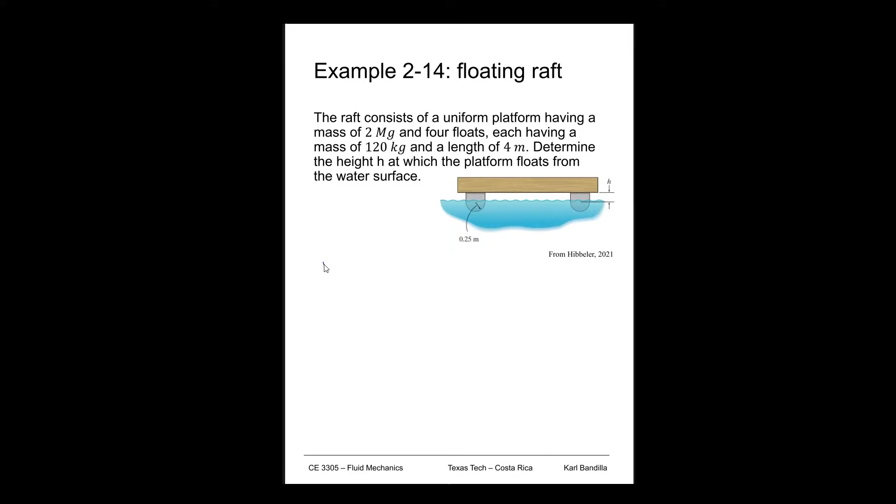So of course we know that if we have 4 floats, a quarter of the entire weight of the platform will be supported by each of the floats. So the weight that each of them will support will be 1/4 times the weight: 2 megagrams times g, plus however much each of these floats weighs, 120 kilograms times g.

That is then 1/4 times 2 times 10 to the 3 kilograms times 9.81 meters per second squared plus 120 kilograms times 9.81 meters per second squared. And that gives me a value of 6,082.2 newtons. So this is the weight that each of these floats will have to support.

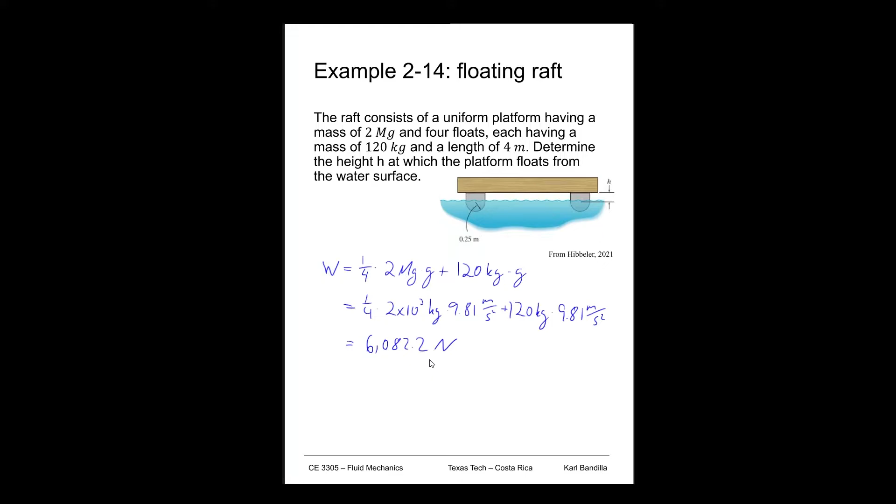Now, if we think about a free body diagram through one of those floats, something like this. Let me draw a better circle here. Because it's sinking into the water, we'll have our FB, our buoyant force, and we have the weight that we just calculated. Based on this, we can easily see that our weight has to be the same as our buoyant force, right? Otherwise it would sink.

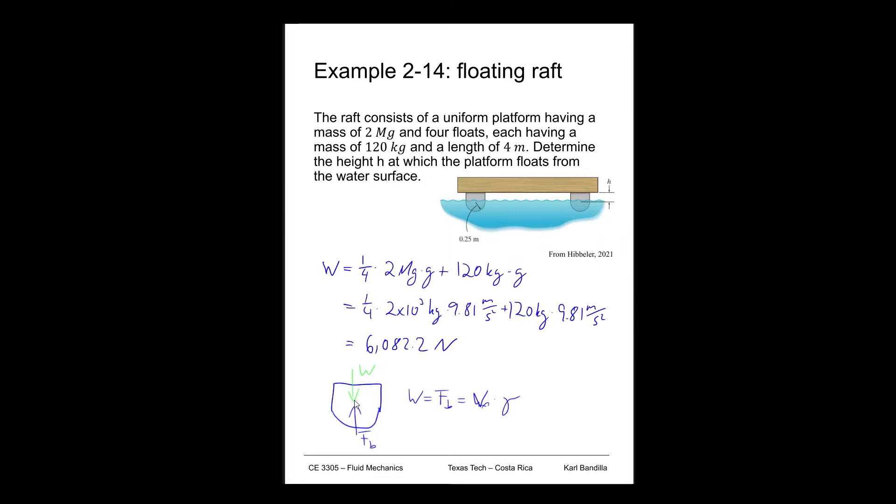We know our buoyant force is just the volume of the submerged object times gamma. So we need to find what the submerged volume is, so we can calculate the buoyant force. So let's do another sketch here. We have our half circle, and then we have the top part on here. We know that the radius here is 0.25 meters.

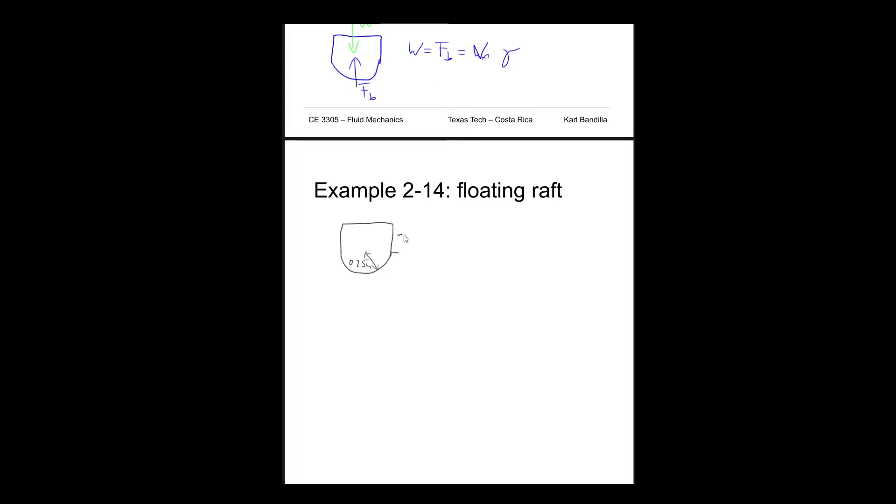And now we want to know what the height is here. If it sinks in to somewhere, the water level will be there. So that'd be the height. We also know that overall the width of this would be 0.5 meters, 2 times r. Based on that, we can calculate what our volume would be: the half circle times the length.

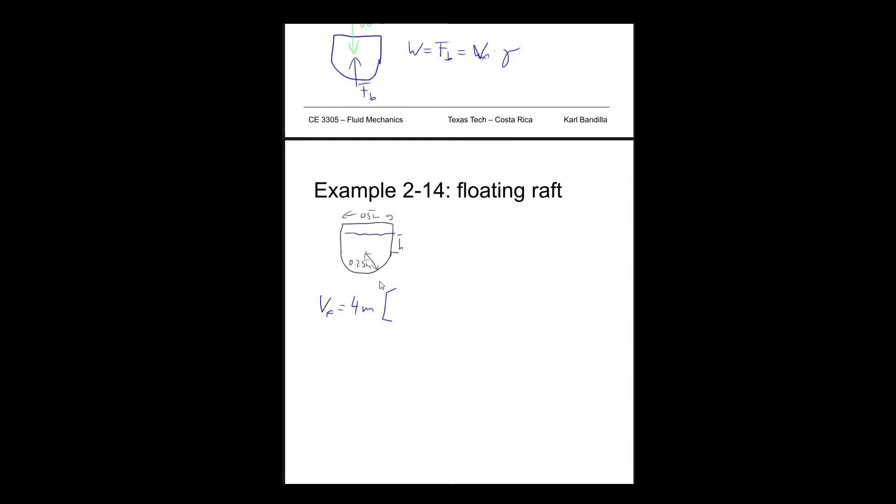So we can say VF is the length, 4 meters, times the half circle, so pi over 2 times the radius, 0.25 meters, squared. That would be the lower part, and the upper part is just 0.5 times h. So if we pull out the 4 meters and work with all these numbers, we get 0.125 pi meters cubed plus 2 meters squared times h. So here we have our h.

So now we can go back to our equation up here, where we said that the weight is equal to the buoyant force. That means the weight has to be equal to the submerged volume times gamma. So W is equal to VF times gamma. We figured out what VF is, so that'd be 0.125 pi meter cubed plus 2 meter squared times h, all this times gamma.

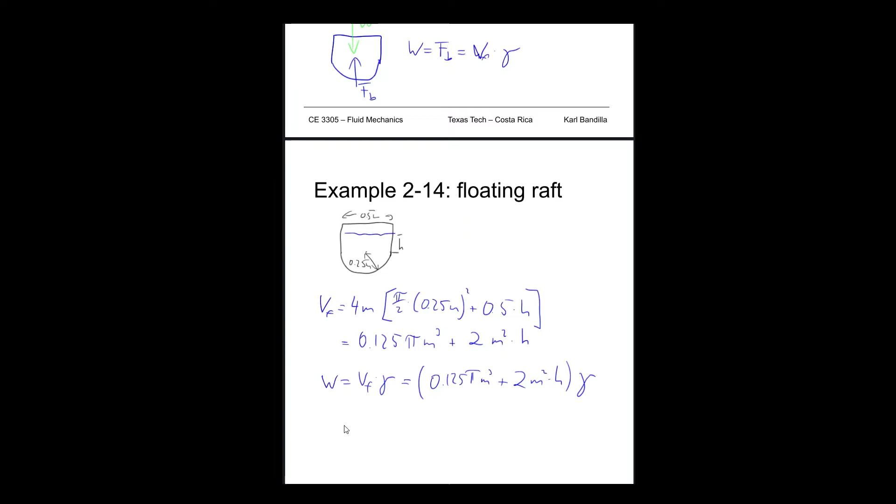So now we want to solve this for h, that's the thing we're looking for. We multiply this out, so we get 0.125 pi meter cubed times gamma plus 2 meters squared times h times gamma. That means 2 meters squared times h times gamma is equal to W minus 0.125 pi meter cubed gamma. Basically, we took this term and brought it to the right side.

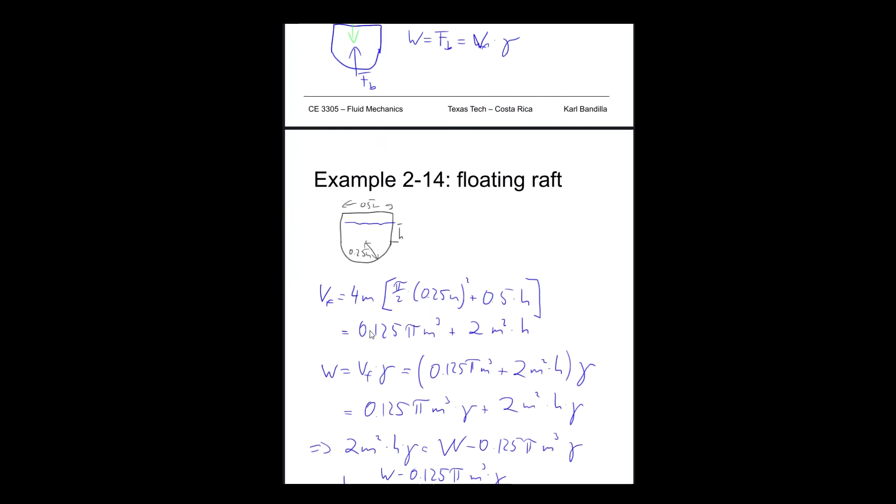And then if we divide through, we get h is equal to W minus 0.125 pi meter cubed times gamma, divided by 2 meters squared times gamma. Then we plug in numbers, where we calculated our W earlier as 6,082.2. So we get 6,082.2 newtons minus

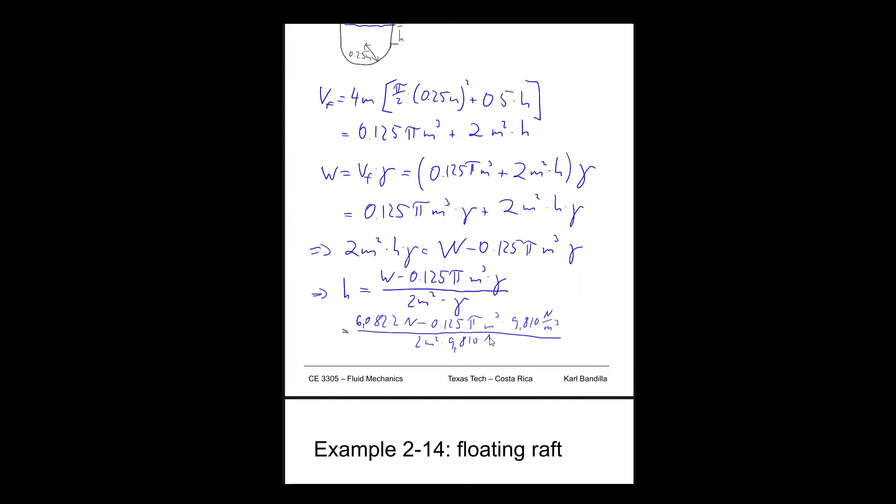0.125 pi meter cubed times 9,810 newtons per cubic meter, divided by 2 meters squared times 9,810 newtons per cubic meter. Let's put this on the next line to give ourselves some space. That is 0.11365 meters. If we round this, 0.114 meters, or 114 millimeters. So what does that tell us?

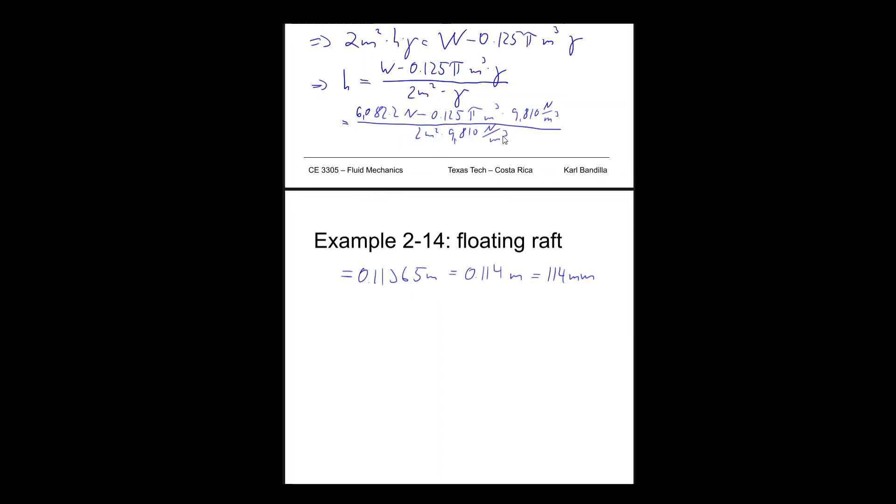That tells us, if we think about our float here, there's going to be a distance of 114 millimeters going from the center of this upward. Now, if we knew how tall this entire thing is, then we could subtract it, but I don't think that's necessarily given in this problem.